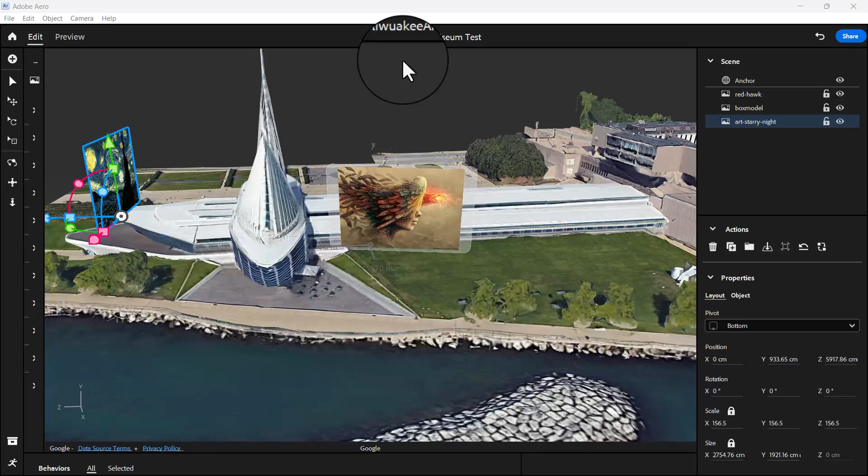In our previous lesson, this was what we were able to do. We added our location, and then we did some GIFs. Now we want to add other assets just so we can try something.

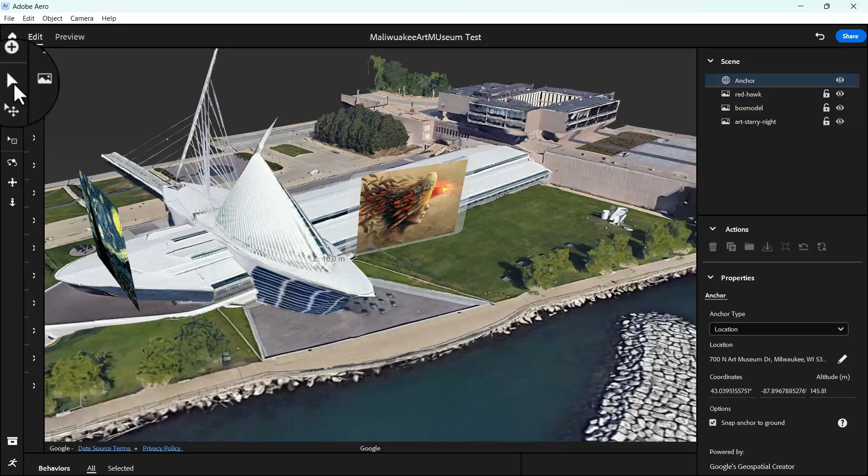Let me draw this here. Then let's look for nature and plants. No, let's look for animation. You can decide to put a dinosaur, but we want this.

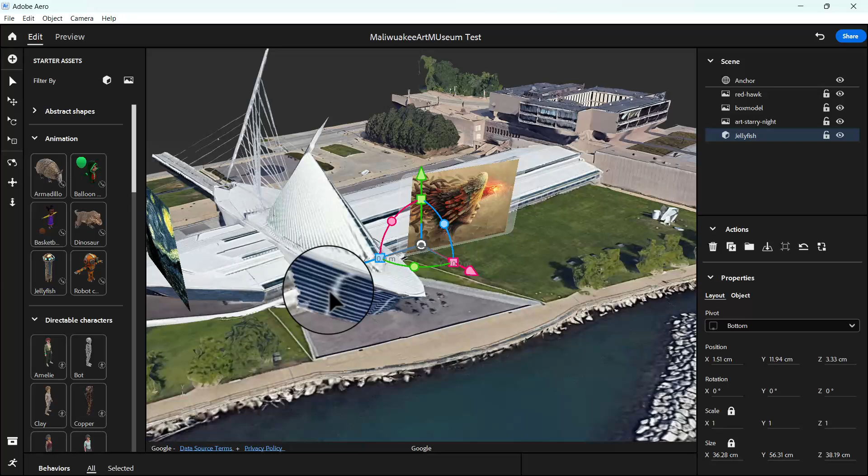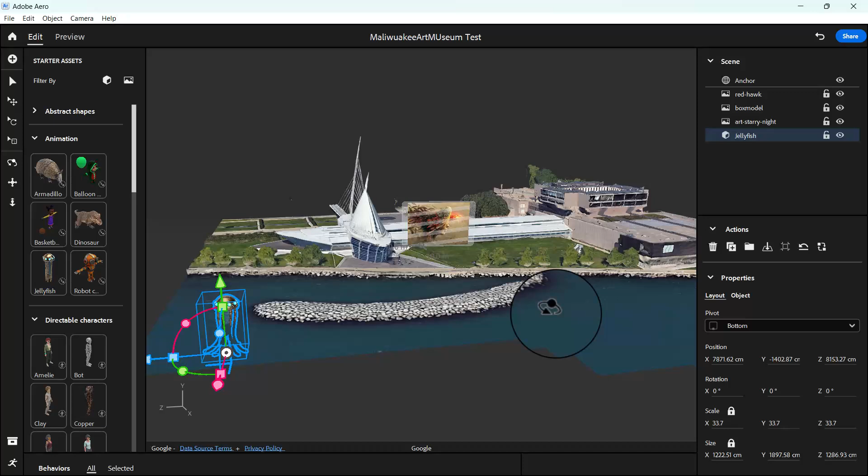We want the jellyfish to come from the ocean, so I'm going to put one here. Then I'll enlarge it by clicking this box. Remember, in a 3D environment you always have to go around the object just so you're sure of the positioning and sizing. I think I like it here.

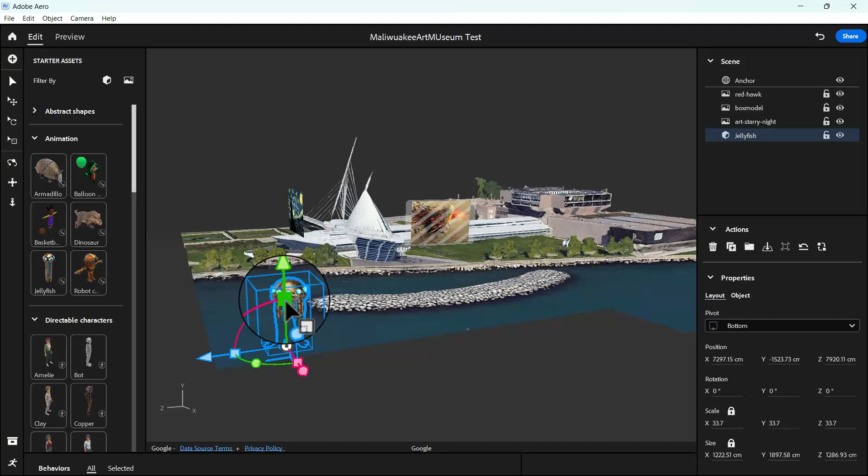I can decide to duplicate it and put it here, but we want to make things easier because we would animate this, and once we duplicate the animation, it would be reflected in the duplicated copy too, so we don't have to redo things again.

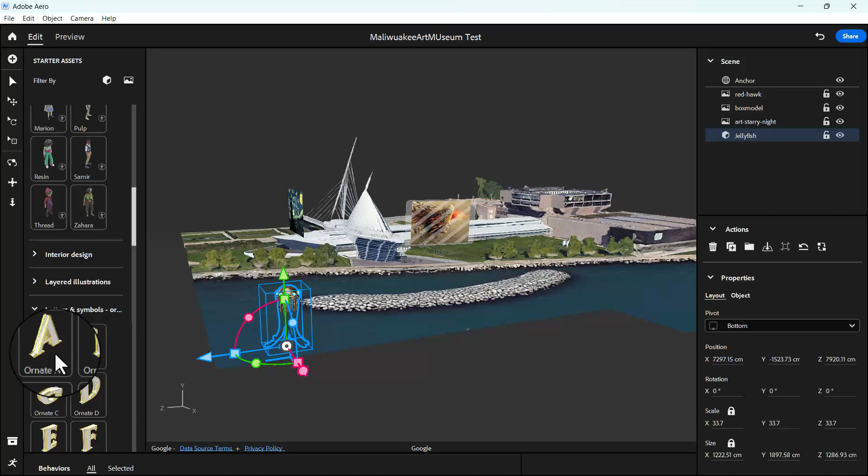So now let's look for some letters and symbols. Let's do MAM, for Milwaukee Art Museum, so we're going to do M-A-M. So I'm going to pick the M and make it big.

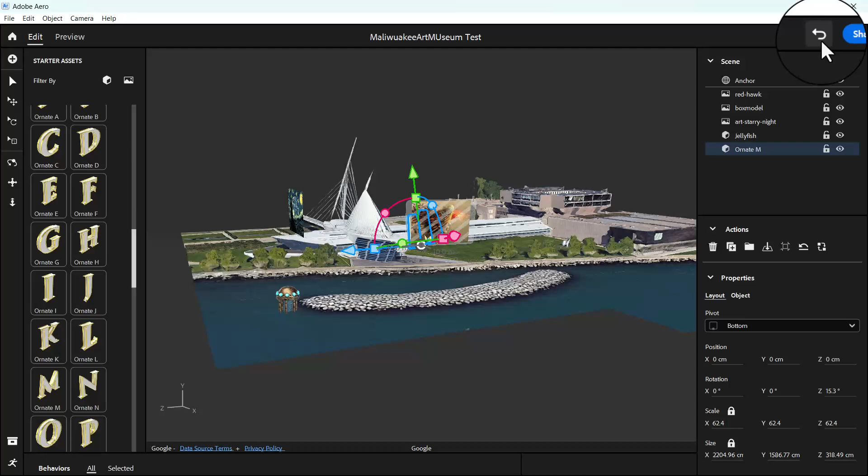Oops, how did I rotate it? Undo. Rotate. Okay, then bring it here. Now rotate it. Let's go this way, rotate it. Then I'm going to reduce it again.

So I actually want to put it on these gravels or stones. Let's try something I've not experimented with. I'm going to duplicate it and bring this here, then let me see if it allows me to replace it with starter assets.

So starter assets, are these assets available here? Let's look for letters and symbols, this one we want, and I'm going to look for letter A. Okay, yeah, so it works. The reason I'm doing that is just so we have the same sizing - we don't have to pick an A and resize it here, it picks up the size automatically.

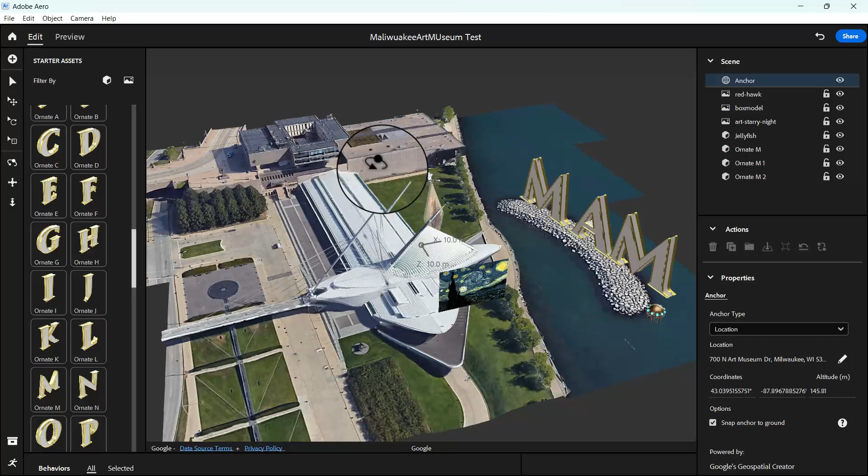Let's see what we can do. We like what we have, but we need to do some work here. So I'm going to click here, rotate it, bring it back a bit, and try to resize all of them just so they sit on the bank.

Is it the bank or the gravels or stones? Then I'm going to rotate this one a bit, let me see if it's this one. Okay, then I'll bring it forward, and let's see what we have.

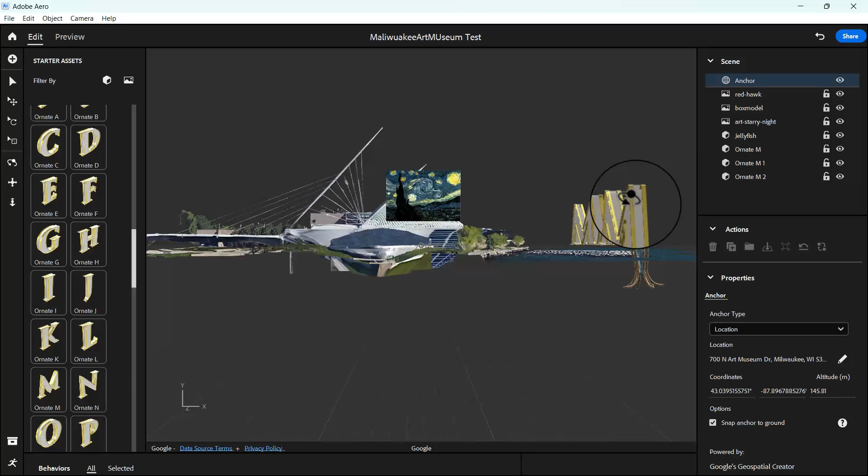Oh, I hope it's okay - they are standing. So I'm going to click, hold shift, then bring them down. I want to zoom in, then bring it down just so it sits properly.

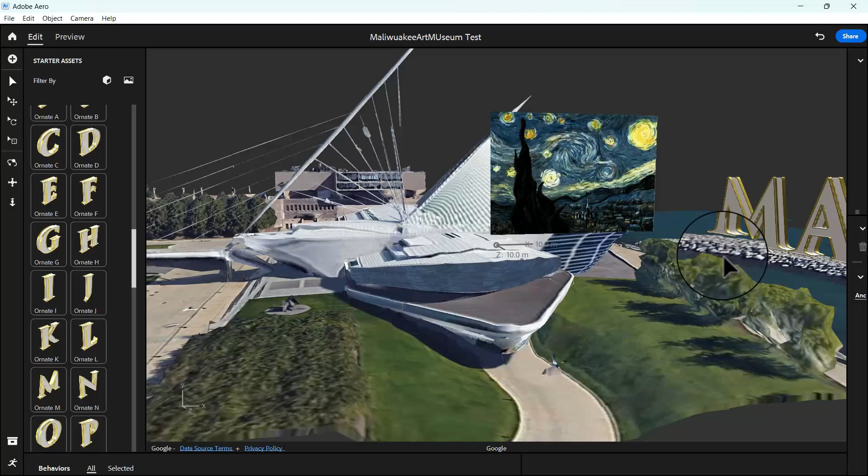Okay, so let's preview our project. I think it's quite okay.

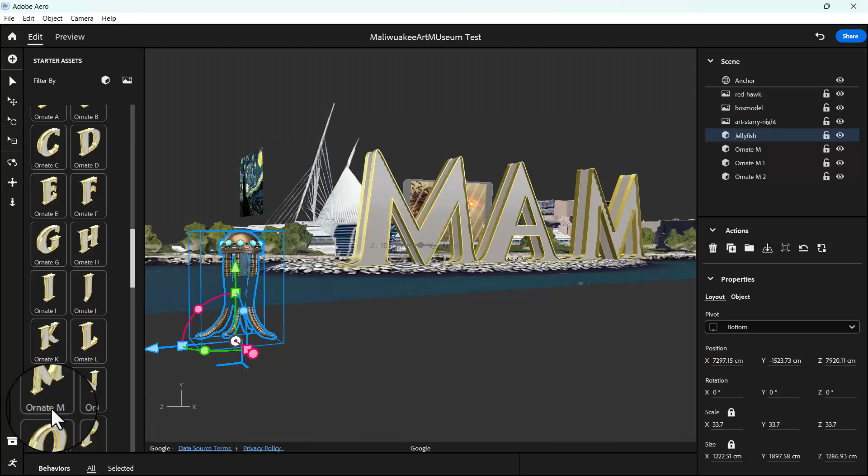And now what we want to do is animate this. So to animate this, I'm going to pick this guy, that's our animate logo here.

Okay, so on scene starts - what do you want? Since it's already selected, I'm going to click play animation, and let's try and see. Okay, so I'm going to make it infinite, and let's see what we have.

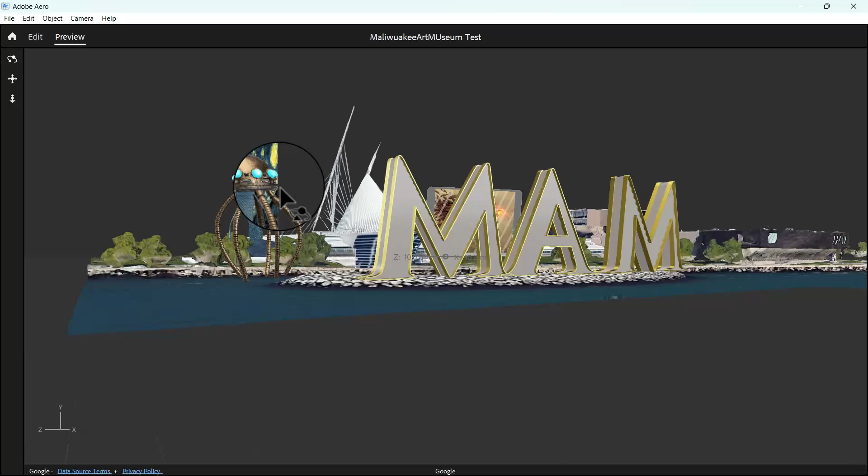I like it, you can even make it big. It's just supposed to make the experience nice, so when people visit the place with their friends they can see something coming out of the water, it will make it interesting. Then basically all I'm going to do is duplicate it, then move it to the other side.

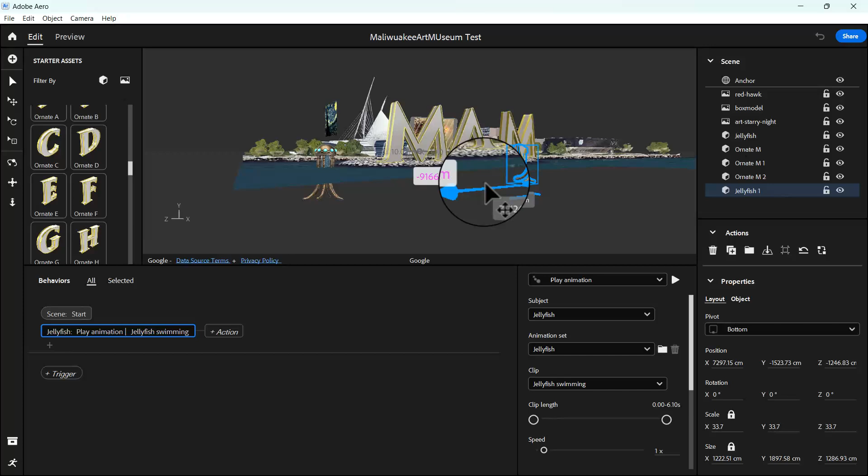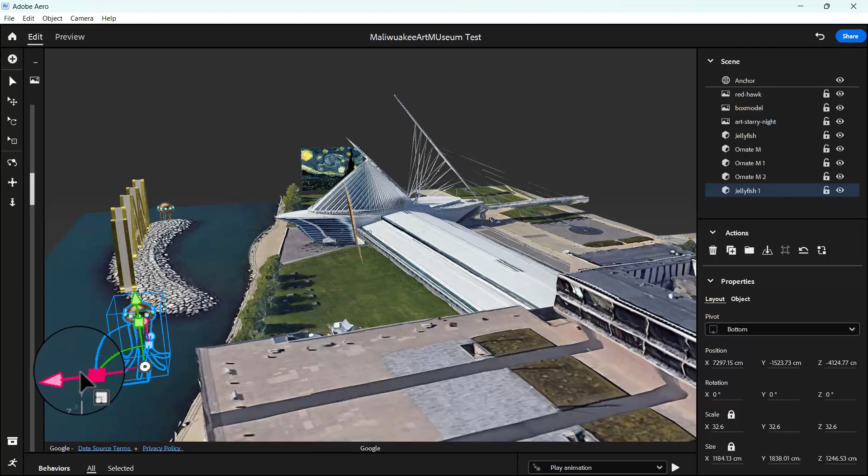I select it and move it to the other side, the other copy to the other side. I'm going to have to reduce this, collapse it. Okay, so let's see what we have here.

Okay, so I think I like it this way, and let's preview what we have here. You can see them coming out of the water. Go back - you can actually move it downwards so that they don't see the head, they'll just see it coming up.

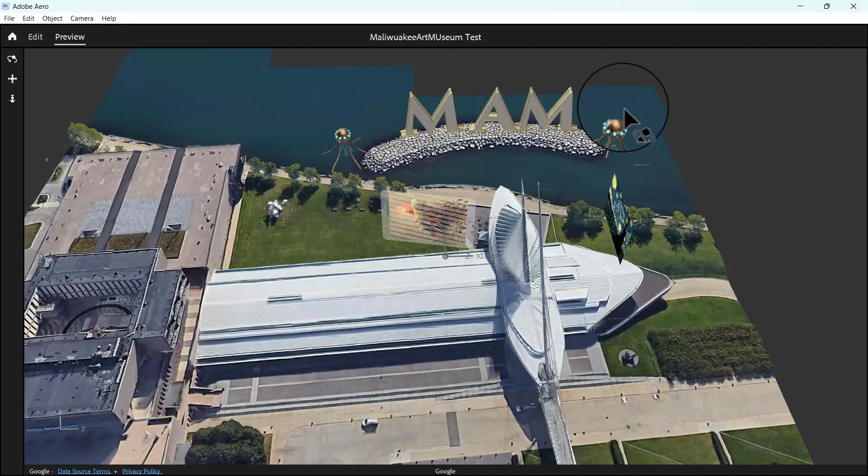So let's see what else we want to do. Now let's animate our GIF, which is our red hawk. So let's click on animate, drag this up, then click here on scene starts.

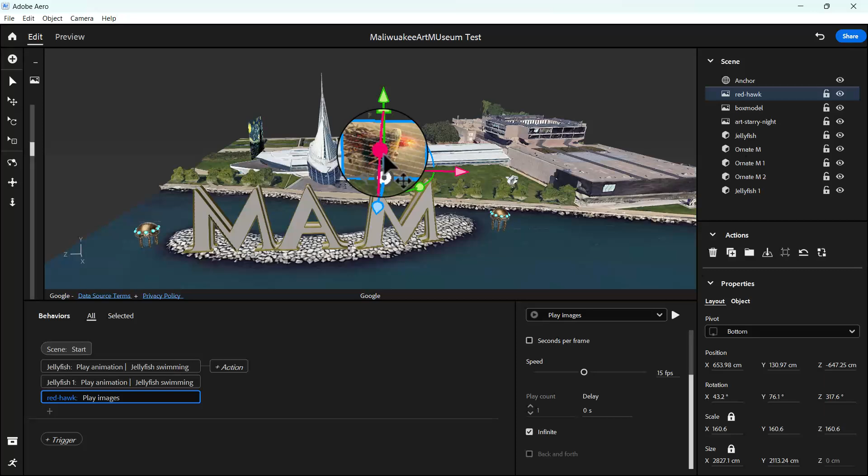We want it to play animation - sorry, play images, since a GIF comprises of images. So to make them work, we need to make sure we play images, not animation. Let's play it and see what happens - you can see it's playing.

So, infinite. Okay, then let's do the same for our starry nights too. Since it's selected, I'm going to click here, click play animations, and set it to infinite. Then let's try it out and see - so this is what we have here, you can preview it and see what we have.

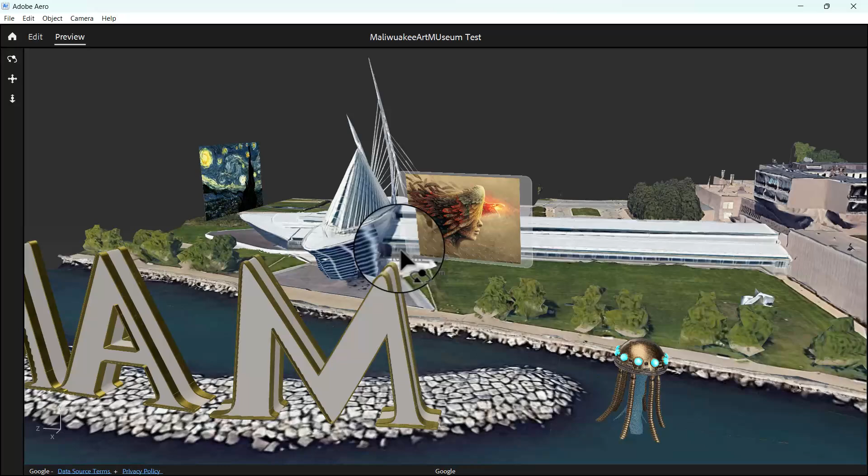So an interesting AR piece. Okay, so yeah, basically this is what we have for our project on Geospatial.

You can do a whole lot of experiments on your own, do some trial and error, position things however you want, and decide to add any kind of object into your projects. Okay, so thank you, and I'll see you in the next lesson. Thank you.